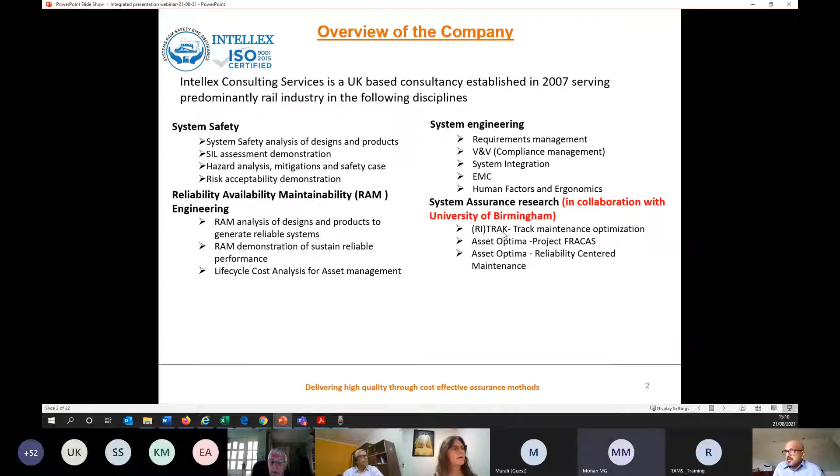We also have a collaboration with the University of Birmingham, so we do some research support as well. We are developing some tools in RITRAK, which is already in the market at the moment for track maintenance. We also have a tool, FRACAS, to support the FRACAS process in projects. And we have RCM, reliability centered maintenance, which is the extension of this FRACAS to the maintenance phase.

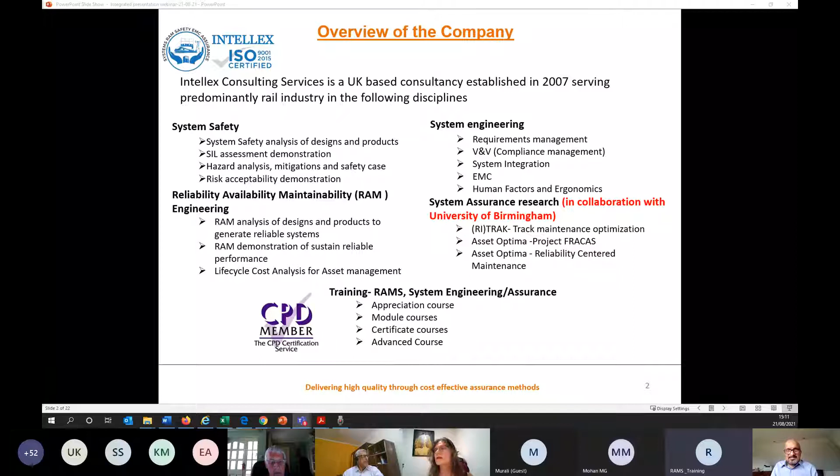Okay, for the training, we have the appreciation course. This is the training part. We are also a member of a continuing professional development body in UK, so they accredit our courses. We have this appreciation course, which is for beginners, senior managers, and all who want a general idea. Then we have module courses for those who want in-depth knowledge in each of these topics. Then we have certificate courses, which is an amalgamation of these module courses to get the RAM certificate and so on. And the advanced course is a detailed course which covers all these disciplines, and this has been accredited by IRSE UK as well.

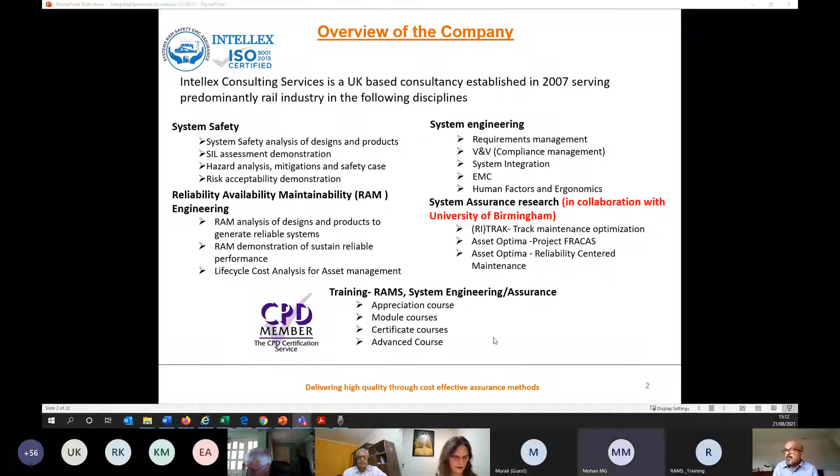Okay, so I'm covering the system engineering part of it. We'll just quickly go through that topic. Many of the people will be new to these topics, so that's why we are covering some basic facts as well, and we talk about the application side too. So what is a system? We hear it in several occasions. It can be at the product level, where you have several components with different functions integrating, or it can be at a subsystem level, or it can be at the system level.

Here is an example of a system at a railway level. Let's examine a system whose main function is taking passengers from A to B.

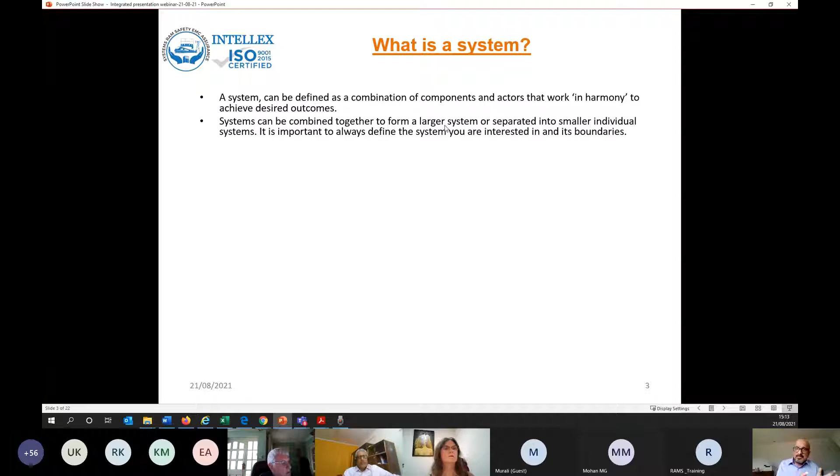So it's a combination of components and actors that work in harmony. There is always an objective of the system. It's not just a group of components together. They have to work for a common objective. So it can be combined to form a larger system. So then you manage separate subsystems separately, basically.

So if you take passengers from A to B, you need a train, and the train is one of the complex products. So you have several elements with different functions. When you are looking at the railway level, the whole thing is one black box. As far as the railway user or operator is concerned, this is one box that takes the passengers on, and it has some functions. Whereas if you go to the rolling stock manufacturer, then you have several suppliers providing this. So there are these functions, they will allocate to each one of them, like coupler, gangway, door, each has a different function. There is a limitation of time, I can't go through in detail.

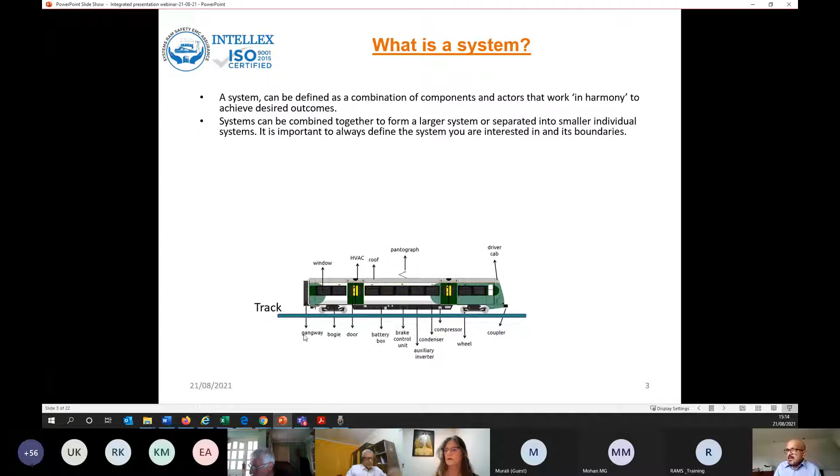So for taking the train from A to B, obviously you need a track. You need to run on a track, and the track has its own elements, switches, route setting, and all those elements are there. Then nowadays in metros, the trains are driven by train-borne signaling. So the train is intelligent, it controls its speed according to the movement authority given to it. Then it opens the doors, closes the doors, all these things it can do. It can be driverless as well.

Wayside signaling. Wayside signaling looks at the other trains and makes sure that each train does not collide, doesn't derail, to take passengers safely from A to B. So that's the wayside element of it. These interact through radio, basically, nowadays. Then you have train-borne communications for any kind of emergencies. If you need to contact the control center, you need the train-borne communications, which deliver their function through the wayside communications as well. You've got radio masts, antennas and all, which deliver the comms functions.

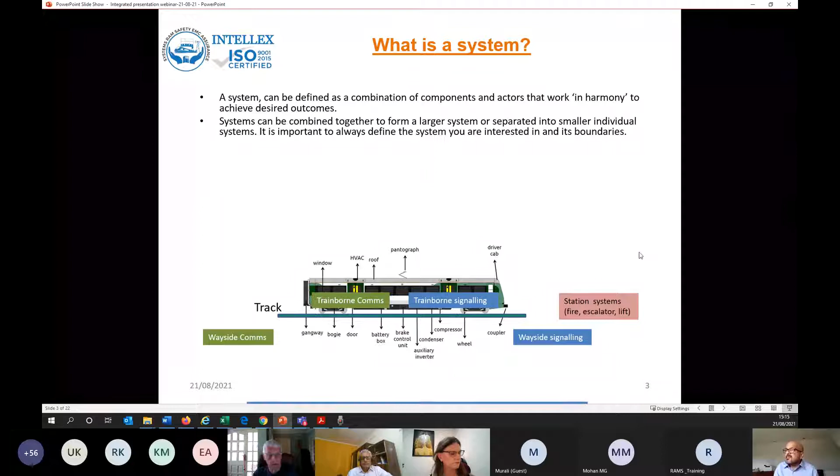Then once the passengers reach A or B, they need all the station systems, escalators, lifts, and also the safety systems like fire and life safety have to be there. So it's quite complex systems you need to handle. And it needs to be powered. So you need an overhead catenary system or a third rail, or otherwise diesel engines, locos have to be there. Then operations also form a part of it. Actually, the human is also part of the system, basically.

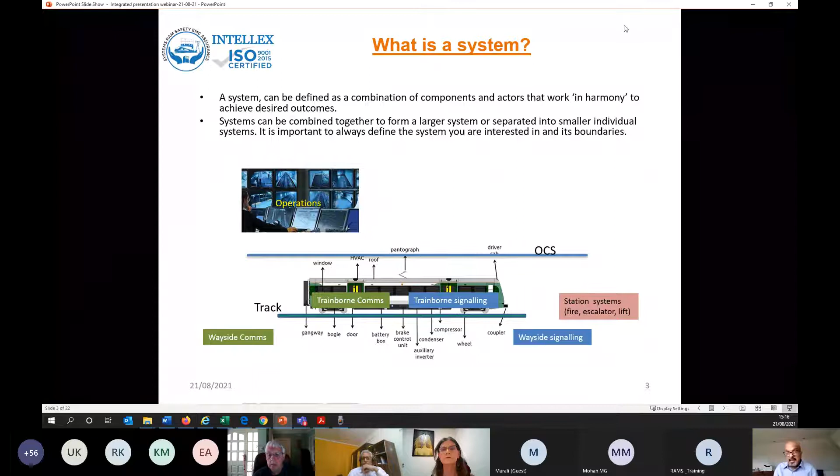So operations is quite important because if the system is working normally, then safety is secured by the system. But if it goes to degraded, then the system would say no, I can't ensure the safety. Then it's up to operations. So they need to have all the procedures in place to cover emergency and degraded operations. So that's quite important. Maintenance is also important. All the assets should be demonstrated fit for service because it's a public utility. So public safety is dependent on the fitness of the assets.

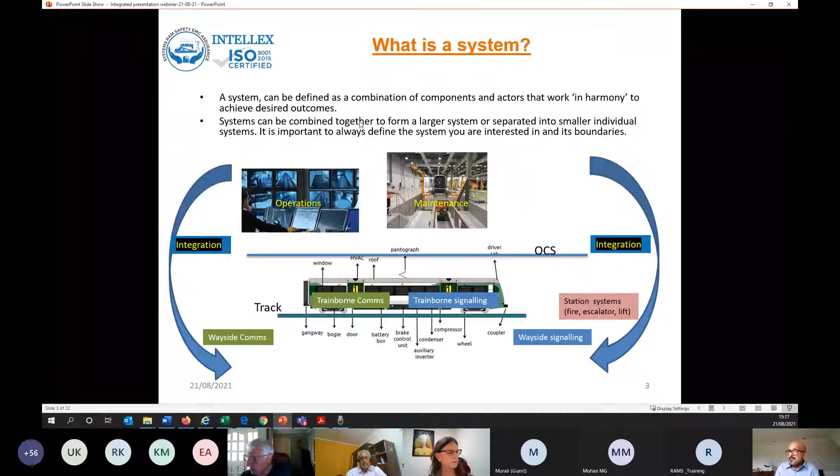For example, if the track is not correctly leveled, the train can derail. The signaling system and all, at least they are fail-safe. So even if it fails, it's fail-safe so that it will not injure anyone. And the system is about integrating all these elements to deliver that function of taking passengers safely from A to B. So that's system integration: all these elements have to work in harmony. So this is the definition of a system.

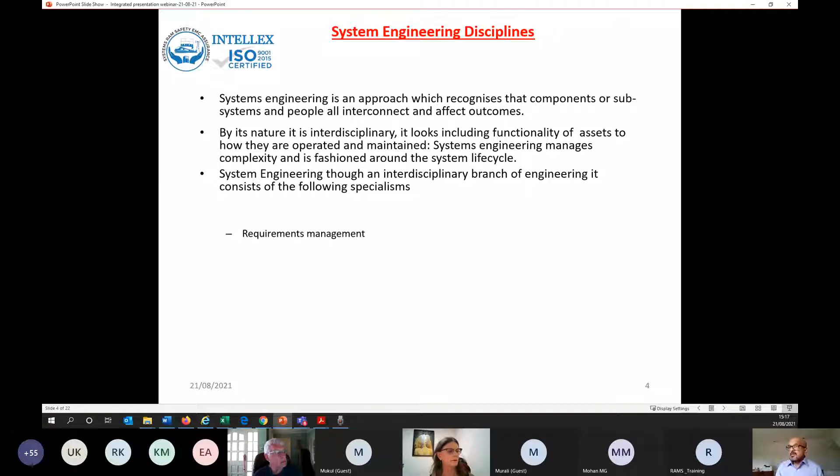System engineering discipline. System engineering is an approach we discussed already. It is interdisciplinary. You need to look at the functionality of the asset. The system has its own life cycles. You have different specialist branches: requirements management, which I briefly mentioned earlier. You have system modeling, which is to make sure that your requirement set is complete. It is just like before you build a house, you want a 3D model of the house and make sure that you have all the elements in it. Currently there are sophisticated system models available. Then system integration is quite an important function. System engineering manages complexity and is fashioned around the system.

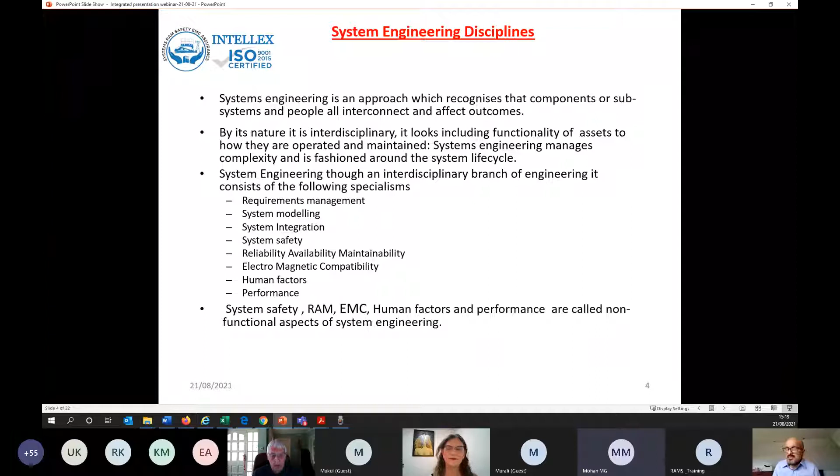How do you assure that the system is safe? First is that you make sure that the design complies with the standards. There are defined international standards in each discipline, so the design has to comply with them. If you are not compliant, then you need to get a concession which is agreed by the authority. So that is the first level of safety: make sure that design is compliant.

Then you have competent people to develop this design, and checking, testing, everything is done by competent personnel. So that is the second level. All these elements have to be there; then only you can say that it is safe. Then products approved for use. Any product in the railway should go through an approval process.

No one should be allowed to bring something directly into the passenger railway and test on the passengers. So it should have a precursor to it. There are lab trials to be done, then the non-passenger lines, then less busy areas. So any safety critical product has to go through this approval process before you put it into place. So that is another mandatory thing.

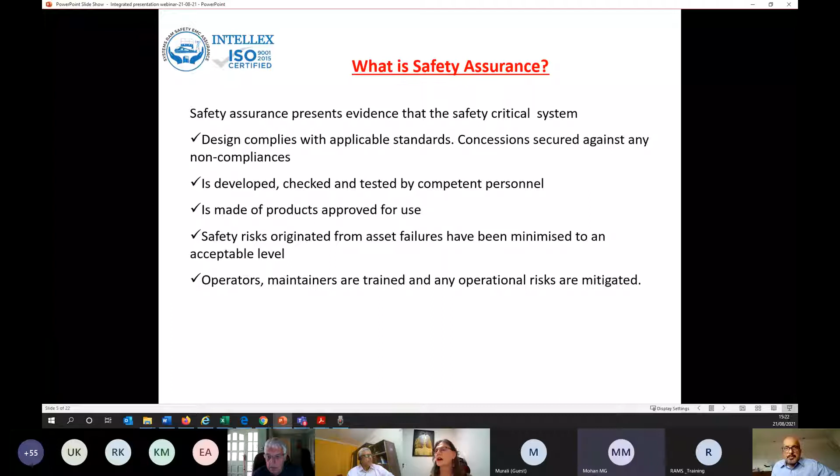Yeah, Kavita, we can try to mute all, then I will unmute myself. Is it your computer? Okay, so now it should be fine.

Then the changes introduced do not interfere electromagnetically with other existing infrastructure. So this is the EMC element of it. Then it does not endanger the neighboring system. So all these elements have to be part of the safety assurance. Then only it can be said that this system is safe for use in the railway.

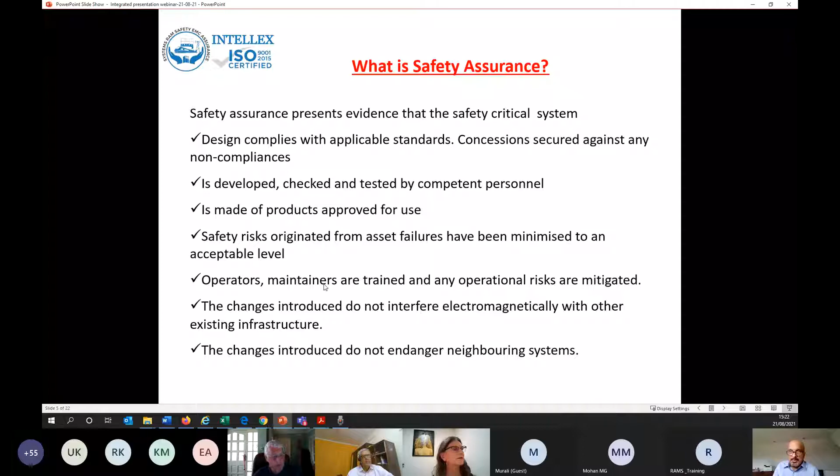So this is the system life cycle. I would invite Maddie to unmute herself and just go through the life cycle. I'm unmuted. Thank you. Right.

The life cycle we've put here is the one taken from EN 50126. Now, obviously, there are lots of different life cycles that you can apply to product development, but this one is specifically written for considering RAM and safety issues. And because it's part of the Euro norm standards, which are internationally recognized and used throughout the world, it's quite a good one to reference back to all the time.

On our course, we actually use this to consider what work needs to be done at specific parts of the life cycle, and what documentation needs to be produced and what needs to be in it. The life cycle is essentially split into three areas, the first being risk assessment. Whenever we do any kind of safety engineering, it starts with identifying hazards and working out what to do with them. At the end of this, you come up with safety requirements and RAM requirements.

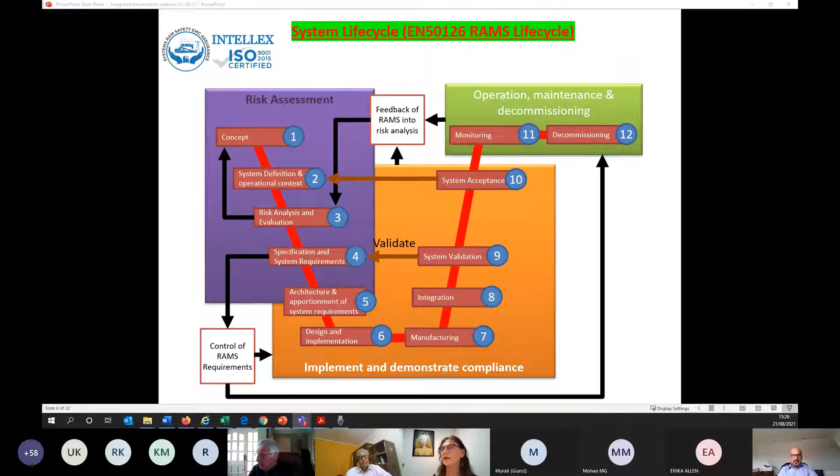The last stage of any system, decommissioning. It's true that a lot of the time we only give a little bit of thought to decommissioning, because sometimes it's going to happen 20 or 30 years in the future. If you're from the civils field, for example, you will really be thinking of how structures can be decommissioned safely a long time in the future. That, in a nutshell, is the system life cycle, and as I said, we use that quite a lot as a reference point in the course, and we will go through that in a lot more detail.

Thank you, Rishi. Thanks, Vinny.

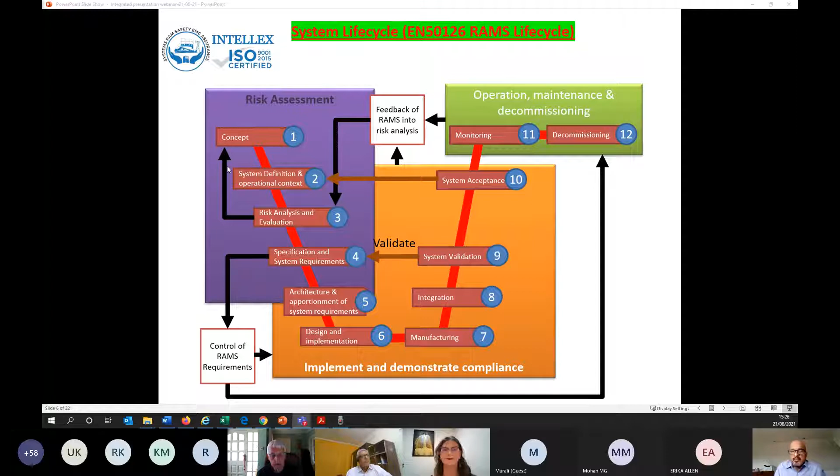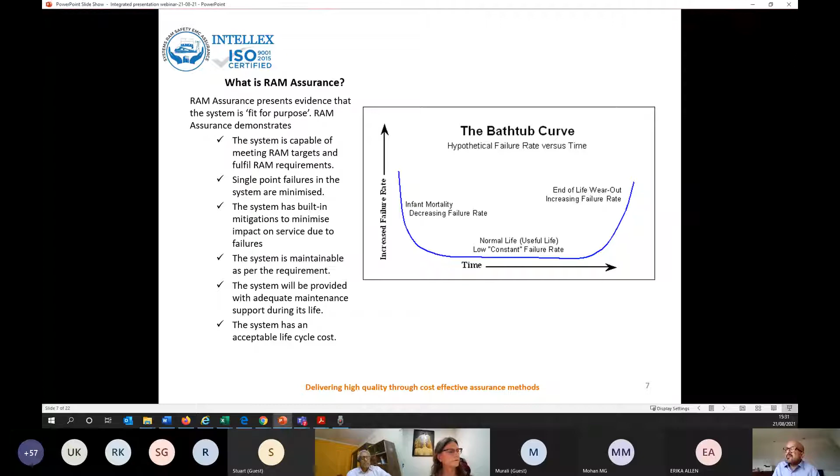Yeah, this is the RAM overview. Mukul, you can just quickly... I will take this.

In the RAM module, to start with, we will understand what is reliability, availability, all the parameters. It is very important to understand the parameters and their quantitative representation, because if you don't have the idea of how quantitative representation can be made, then you can only say, I want a very reliable, very safe system, and the supplier will give you something saying, yes, it is very reliable.

So there should be a mathematical representation in quantitative terms for all the parameters that we hear in our everyday life, like MTBF, MTTR, failure rate. So we will understand how this quantitative representation is done for different parameters. Of course, they are probabilistic in nature, meaning suppose you get an equipment with an MTBF of 5,000 hours, there is still a probability that it will fail within 1 hour. So it all depends. MTBF only gives you a term by which you can calculate the probability of failure in different time periods.

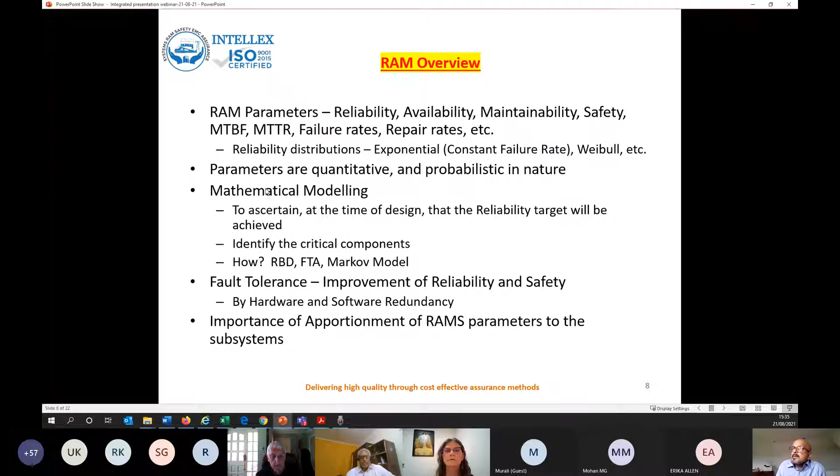So it is delivered at each stage. You may have come across these gate reviews in some of the projects you are working on. So the gate reviews are about looking back at each stage to see what work has not been completed, or what risks have not been mitigated, whether we can work with that risk in the next stage or you need to resolve it there. So normally any kind of safety risks, you would want to fix then and there before you progress. So that will be a no-go gate basically.

As I said, it's a review of compliance and risk. That is what the system assurance process is about. The system assurance reviews recommend whether the project is progressed. That's what I mentioned already.

Okay, next we go to EMC. We are also running an overview of EMC course, for people who want to know about EMC. So I'll invite Stuart to cover this slide. Yeah, thank you very much, Rishi. Stuart Charles here. So a very quick overview on EMC.

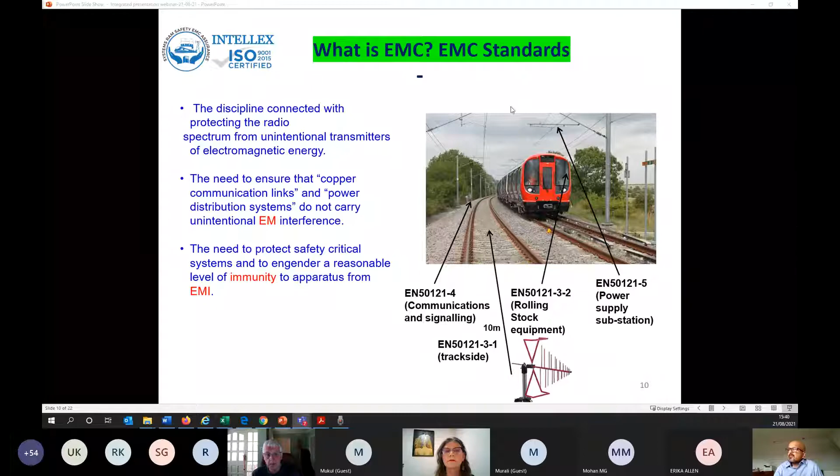Okay. So just for continuity, because Stuart has been presenting, we start the courses with the EMC course. Thanks, Rishi. Right, so very quick overview of the course. This course has been written for engineers, technicians, electricians, certainly management, project engineers, senior management, and the whole thrust of the course is to teach you about EMC in a non-mathematical way. We can go into maths, should you wish, but that's not in the fundamentals of the course. We try and teach the concepts of EMC so it can be understood by everybody who is not an EMC engineer.

The EMC engineer - and I've been in EMC 40 years - usually talks in a strange language with strange terms. As I said before, this is not taught in a university or college course, and it's very difficult to pick up and understand what your EMC engineer is actually saying. And this is incredibly important, for example, from a contracts perspective.

So let's look very briefly through the course. I'll try and move through this fairly quickly because this is a small part of Intellex's overall course delivery. So why is EMC important?

Well, regulations - you have to meet EMC regulations, mandatory. Contractual requirements - if you've got an EMC requirement, and this happens a lot in a contract, people often ignore it, or they may not ignore it, but it gets put on the back burner because they don't really understand what it's saying. That could be quite an issue, because if your contract requires you to deliver some EMC deliverables, some reports, and you haven't fully understood what that requirement is, that could be a major issue contractually for your company.